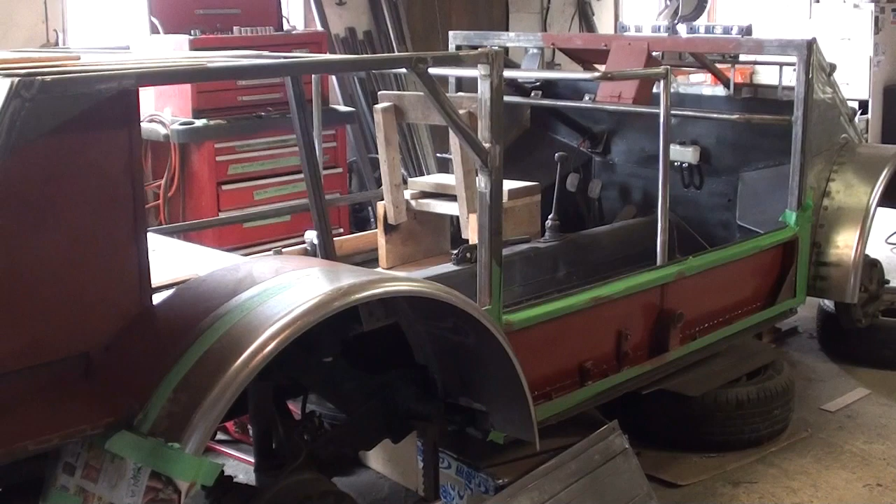Got some loose ends to tie up before I move along and start working on the body panels. So today I'm not going to get a lot of work done. Got some other projects on the go that I have to put my attention to as well.

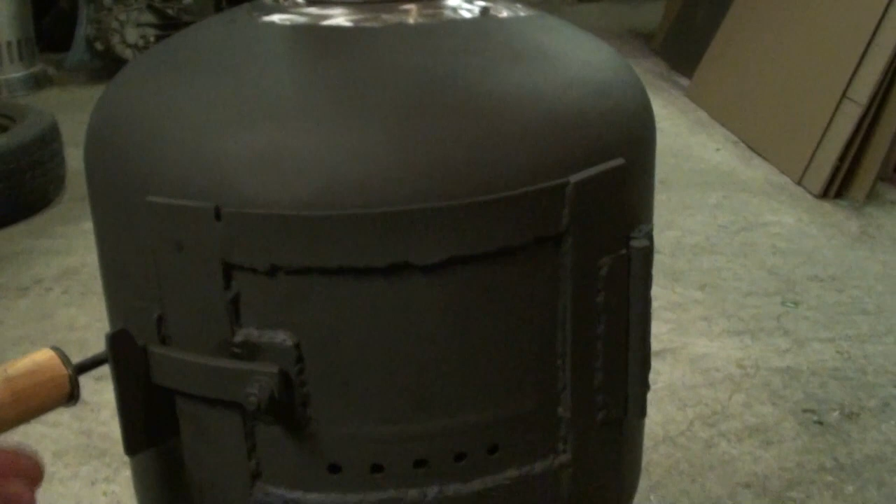I'm going to simultaneously work on the Kubel today and do some painting, and then work on making some fire pits and little mini wood stoves out of propane tanks. It's other stuff I work on from time to time. Kind of got sidetracked on this little guy, a little wood stove for my cabin. Got to finish the bead up here, and then just a little bit of paint, but it's pretty much done.

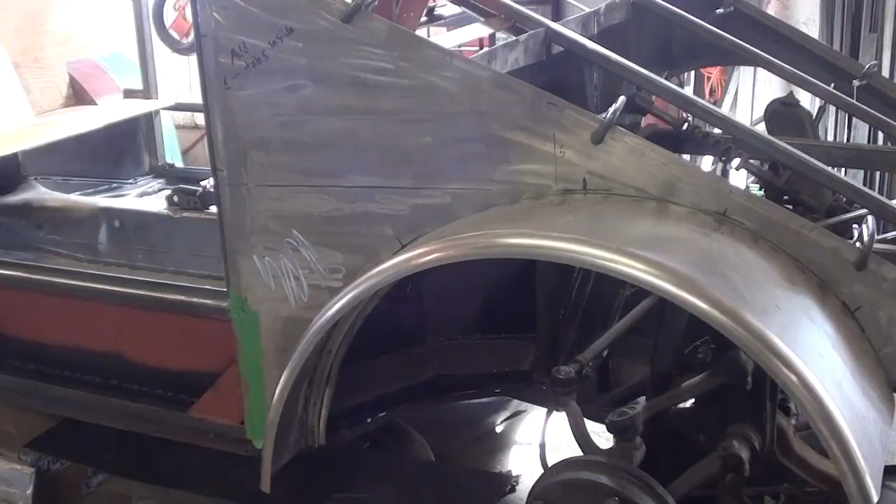Okay, so I'm going to start working on these quarter panels and getting the ribs rolled in on the bead roller. So I just have to do some layout.

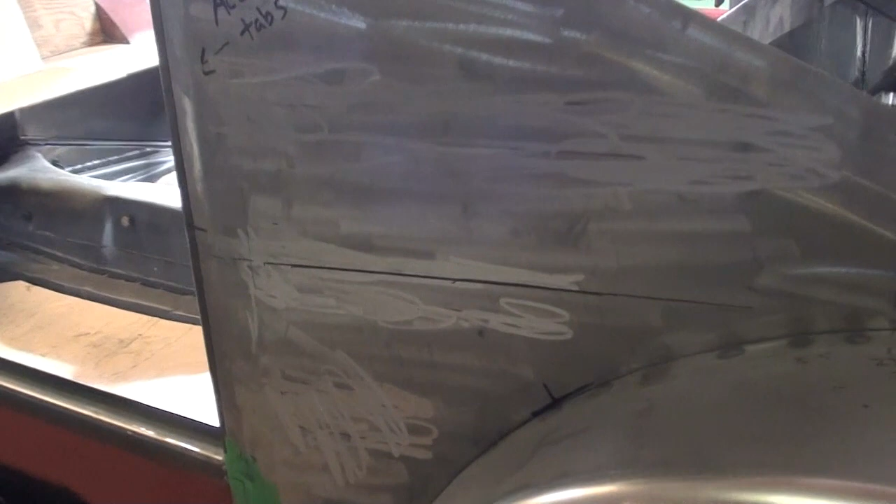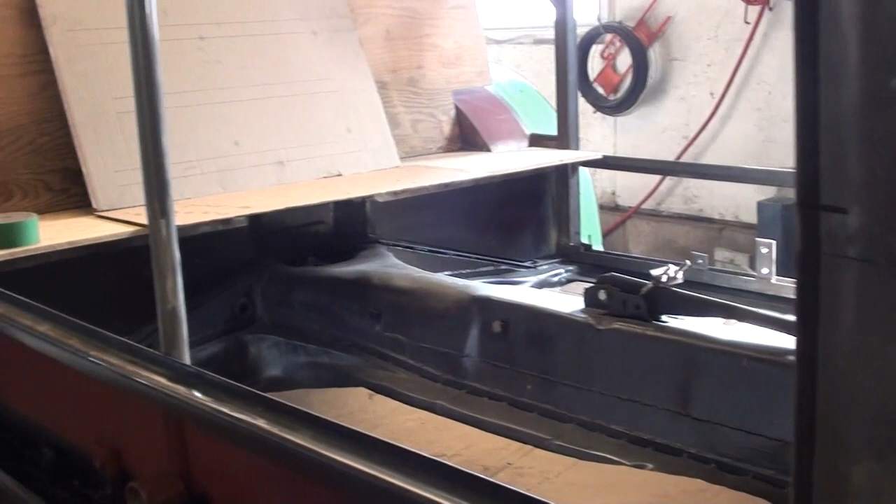I'm really precise about this line here. That's what I'm calling the master line, and I've got that going across, level, all the way, and it transfers over to the pattern on the back. Basically I just need to get the front and back quarter panel to line up to have the ribs parallel and level, and I can do the doors. I can make the doors match later - it's not going to be a problem.

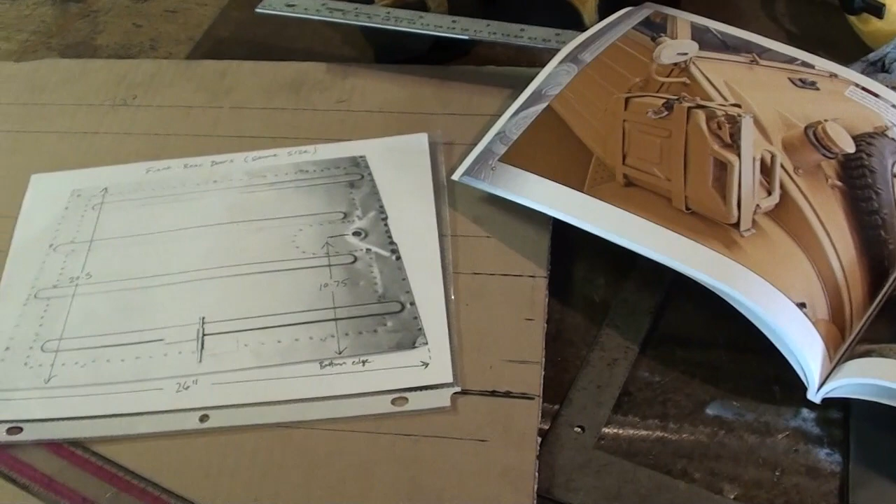So right now what I'm trying to figure out is exactly what spacing I want to use for the ribbing, and the most obvious thing you notice are the two doors and the rear quarter panel. The front quarter panel has 3 ribs on it, but they're very small and not as noticeable compared to what you see from the doors back. So my thought process is get the doors right and go from there.

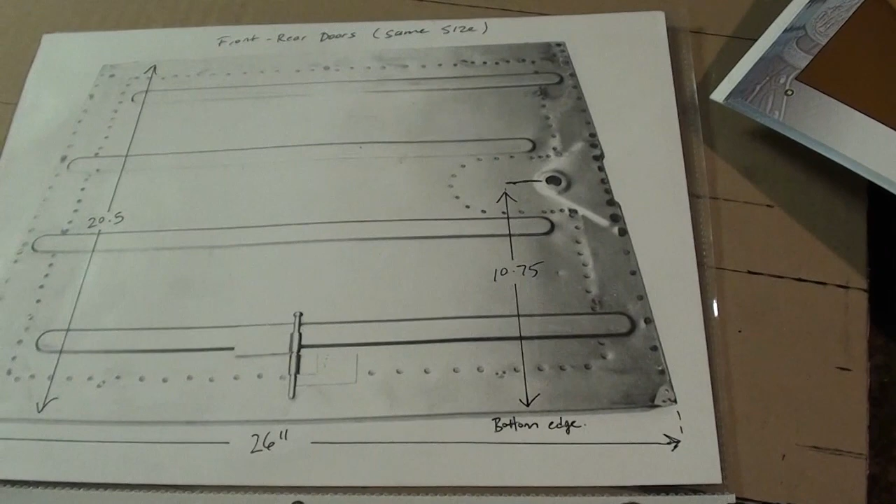Problem is I don't have doors right now. I want to make sure that rear quarter panel is right, so I'm just double checking my work. I had 3.5 inch spacing, and that's what this piece of cardboard here is - a door, 26 by 20. I centered it at 10 inches, and then came out from there evenly.

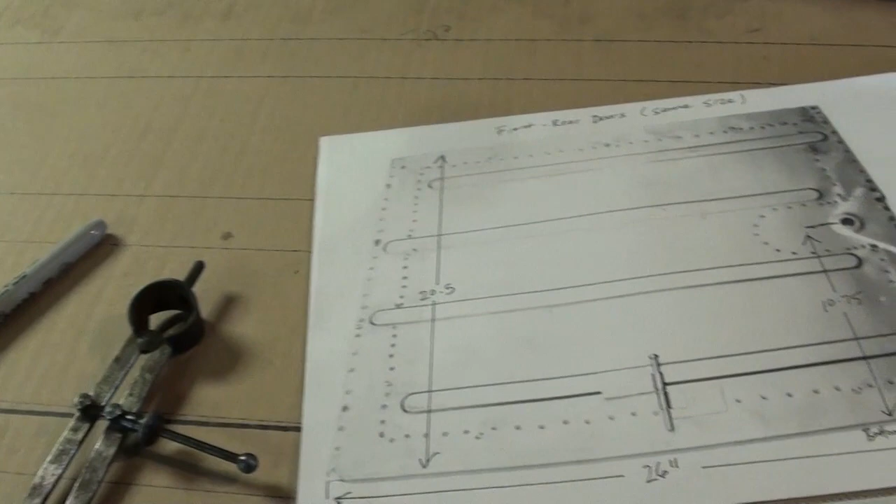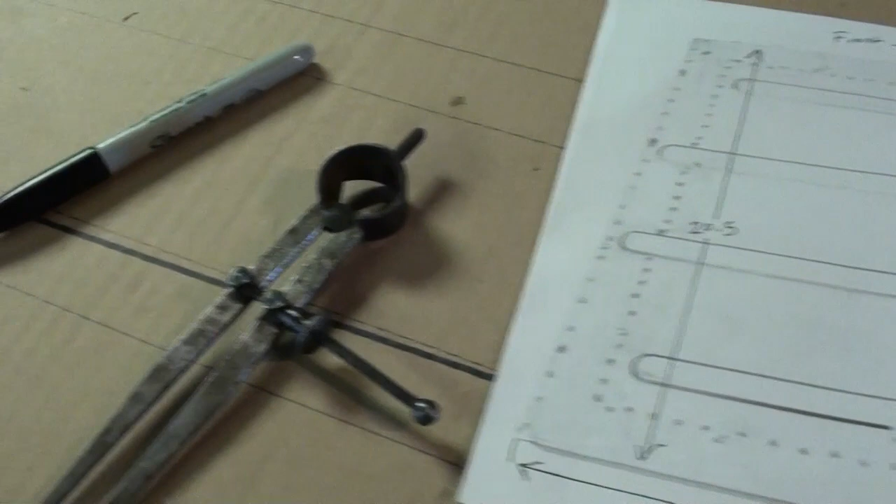This door looks pretty close to what you're getting from different sources. If you look at pictures of a Kubel, the two center ribs are pretty much centered, with an equal amount of space from the top and the bottom. So I had this cardboard mocked up at 3.5 inches, and then this morning I got it in my head that 4 inches was better. So now I'm double checking things, and I was probably correct in the first place.

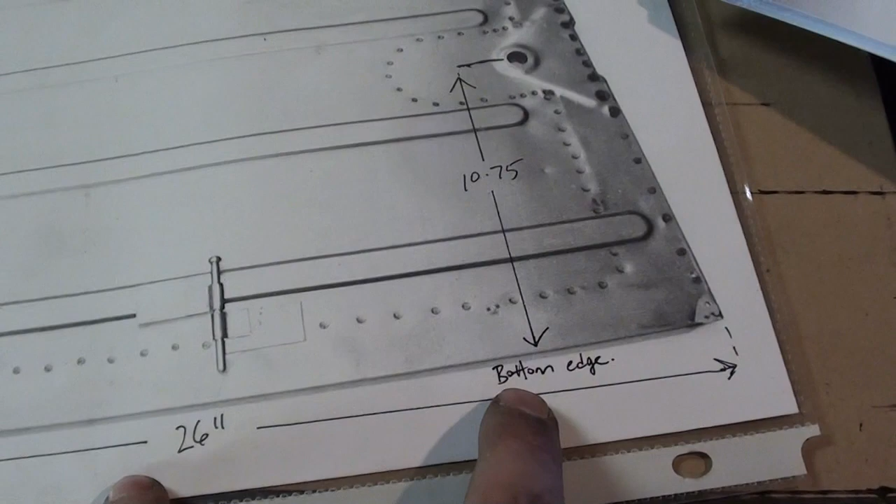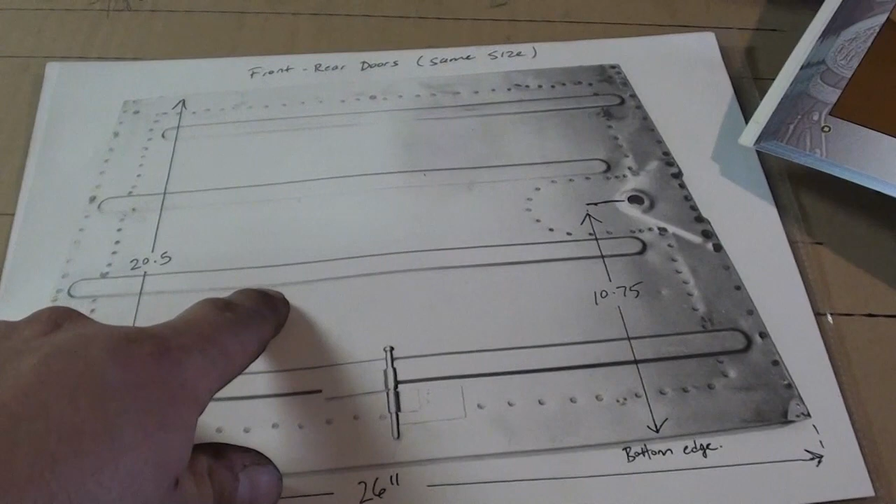The scale of this is roughly 1 centimeter equals 1 inch. Now, you can see the perspective of this photograph - they were kind of back and on an angle, so it's obviously narrower at the top. But if I look at the spacing of this rib here and the spacing from here to here, that comes into the ballpark of 3.5 inches, and it kind of successively gets smaller as you go further away because of the perspective. But I think I can trust that at 3.5.

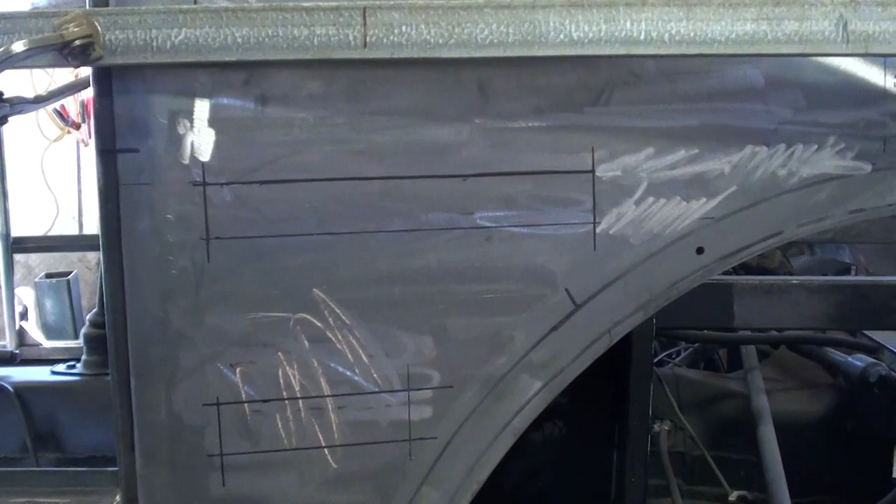So when I laid it out at 4, I thought, oh, that looks fine on the front fender, but then I started playing around with it on the back, and it just doesn't sit right. So unfortunately, I'm going to backtrack a bit here. I'm going to sand off these markings - I think what I did is I had this bar sitting on the fender, on both fenders, and that's the line I took.

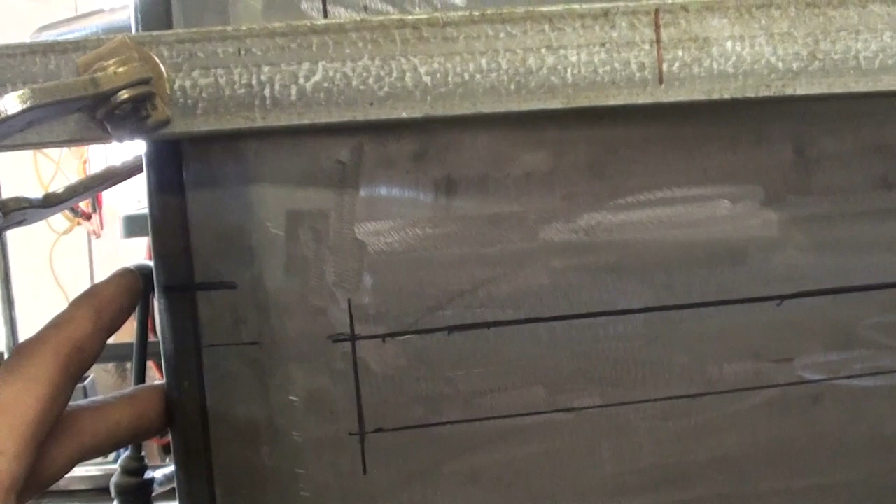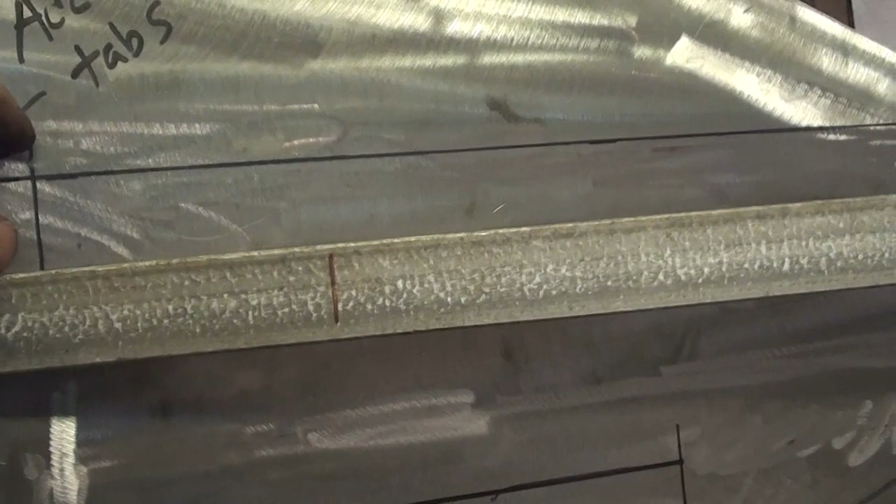I think the bar needs to be up a bit. I'm going to use the lines on the cardboard door, because that's 3.5 inches, and the perspective all looks good on the cardboard door. So I'll transfer over that line onto here, and level this bar from that line back, and that's going to be my master line. Then I'll measure the 3.5 inch spacings for the ribs. I'm using 1 inch as my gauge, because the die I'm using isn't a perfect 1 inch, but that's what I'll go with.

I'll go back, remark everything, and take some video to show you guys the end result, because I want to make sure this is bang on, the lines and everything, before I start rolling the beads in, since once that happens there's no turning back.

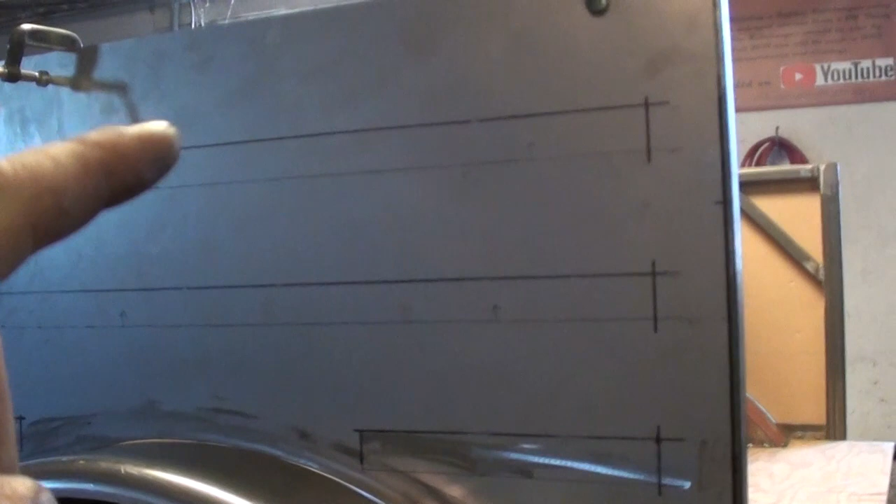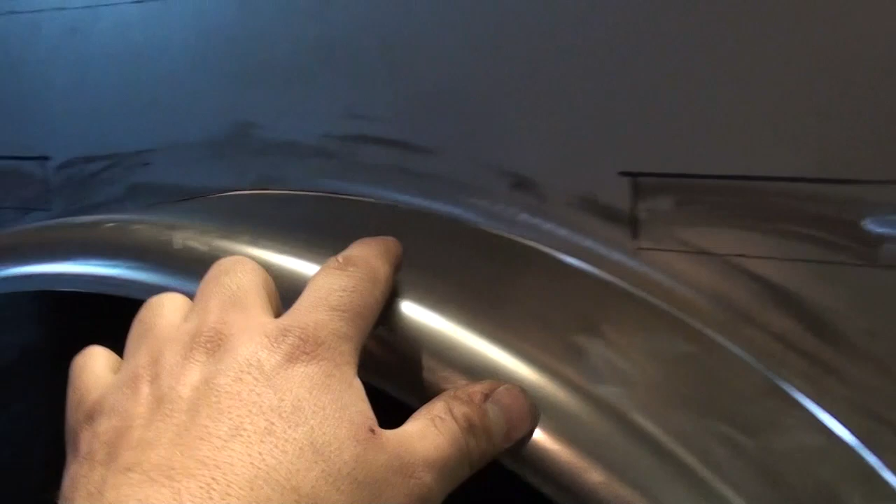So there's the layout at the 3.5 inch spacing, and there's the rear quarter panel. Not perfectly replicating a Kubelwagen. The real issue is this third rib here. It's obvious the fenders are slightly larger on an actual Kubel, they come up maybe 1 or 2 inches higher, and therefore this line is cut off more aggressively. The way I have it, the top of the line shoots almost right across. It could theoretically work, but I might cut it back, stop it a little further to give the illusion.

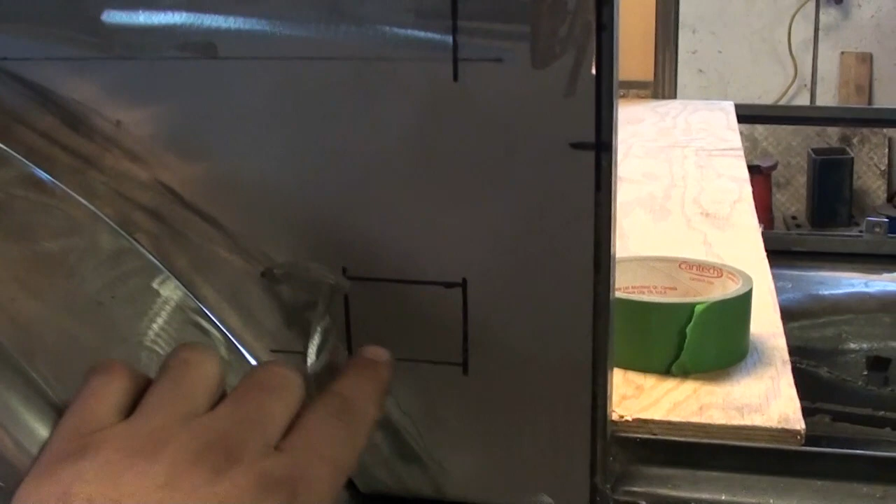And I wondered about this little guy. It's actually there, there's a little cutout, so I'm going to do that just to better replicate it.

I think I need to come over a little further. I didn't want it to come too far over, because it seems to distort the edge of the sheet metal, and I want a nice flat edge here. But I'm going to come over as far as I dare with the ribs, because on the Kubel the door and quarter panel are quite close, not much space in between, so I'm going to get that as close as I can.

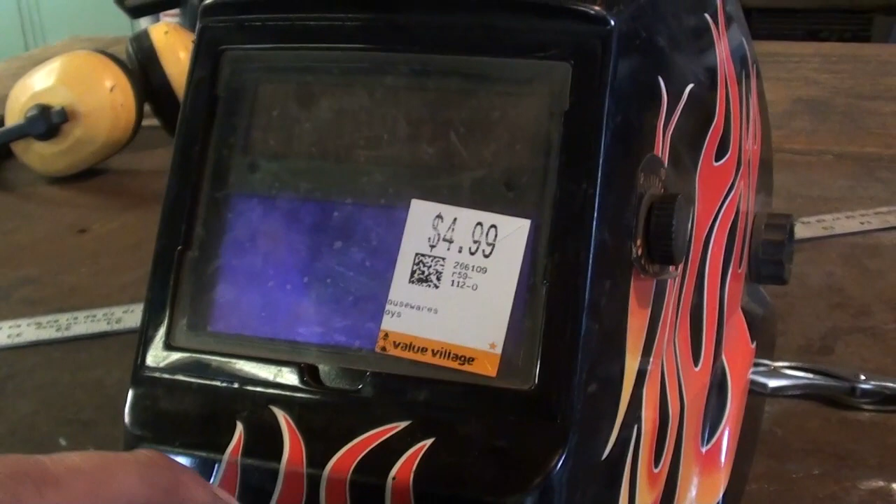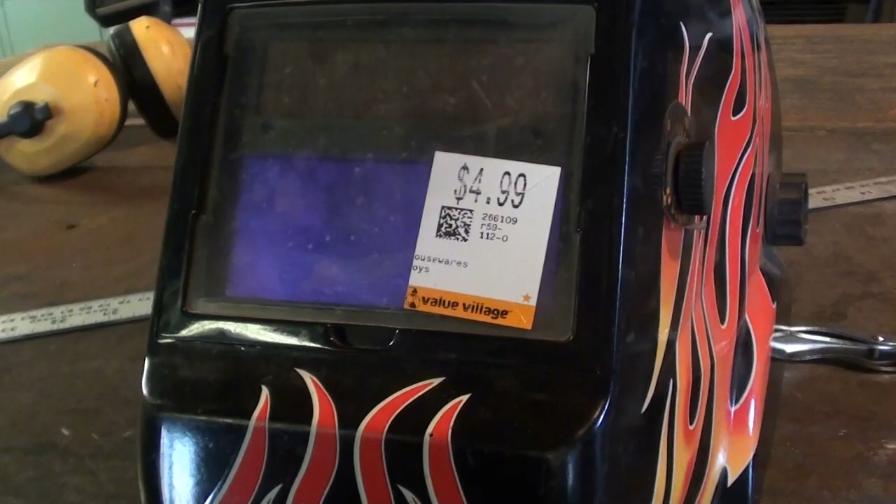Gotta save money wherever you can. Picked this up at Value Village the other day, wasn't sure if it was going to work. Didn't seem like it was working in the store. My wife thought maybe the battery was dead, so we bought it and brought it home. I let it sit outside in the sun, tested it out a minute ago, works fine. So a perfectly good welding helmet for $5.

Okay, so I got the inner rocker panel done on the driver's side now, so that's going to allow me to paint it on the inside tomorrow. It's supposed to be warm, so I'm going to put some primer and some rust paint on the inside.

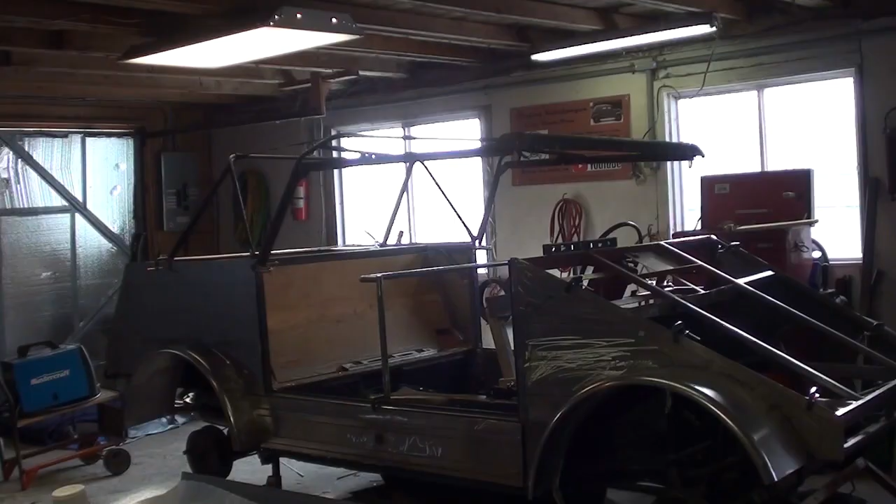So I'm just waiting for a buddy to come over and help out with some of the bead rolling on the body panels. Decided to pull this out of the barn, it's the framework for the canopy for the 181 thing, and I was hoping I'd be able to reuse it, and it's going to work.

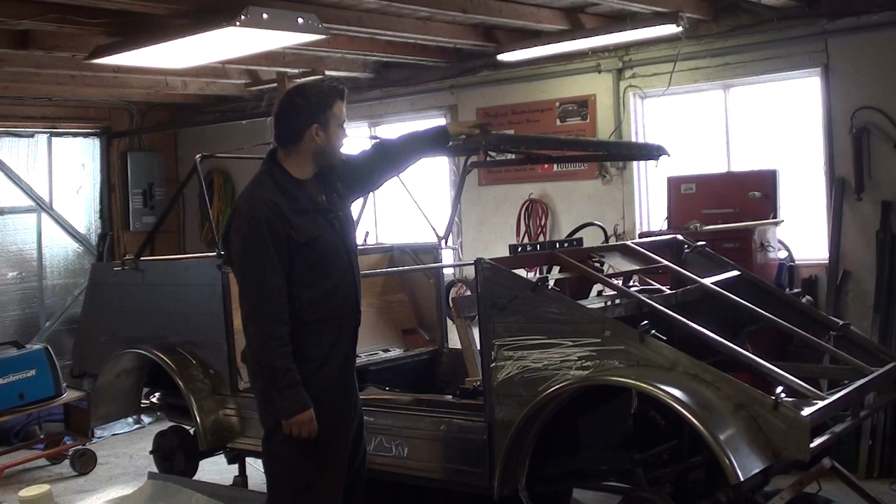Just for simplicity I kind of clamped it here. I think it needs to be mounted back a few inches for it to work right, and I might have to modify the front a bit. Obviously this piece has got to get replaced anyway because it's rusted out, but the front here is where I'll play around with the length. So I'm pretty happy that I'll be able to use this, at least temporarily.

Yeah, it's kind of backlit with those south-facing windows, so you can't really see it well, but it actually looks pretty good.

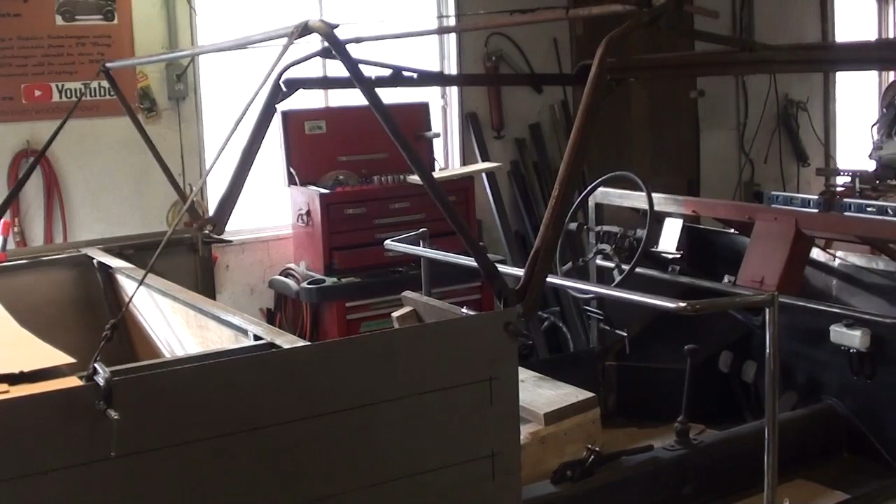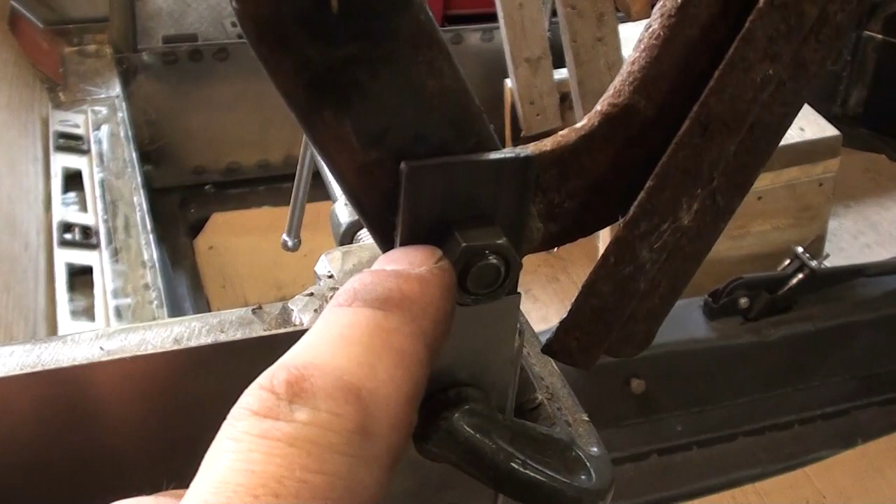It gives you a good idea what the roof line's going to look like. So yeah, there's the mounting point. Like I said, it needs to come back a few inches at least, which is easy, not a problem. It's just a piece of steel with a hole through it, and I've got it C-clamped for now.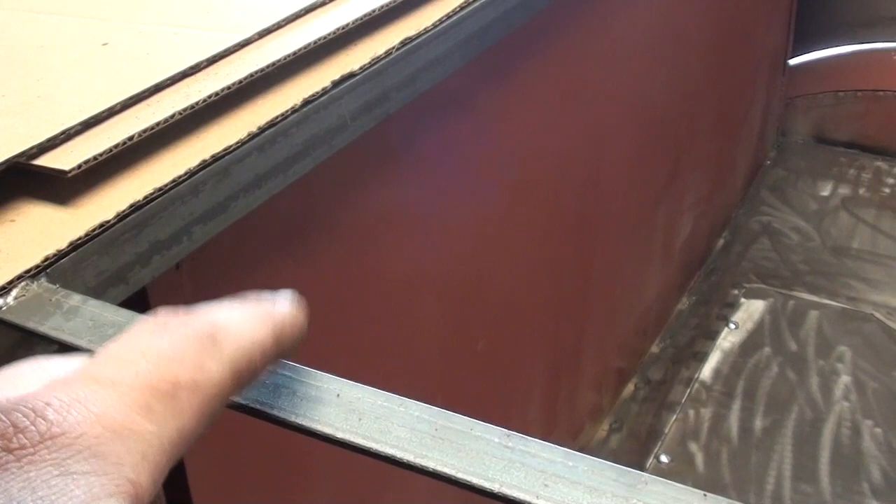It's just to get it fit and see if it's going to work. I had it folded up, and with it mounted here, when it folds up, the problem is one of the crossbars is kind of covering the trunk lid for the cargo area, which I don't like. That gets mitigated as you move it back, but I don't know if moving it back the 4 or 5 inches is actually going to change that. It's still going to be covered up just a bit, which I don't like.

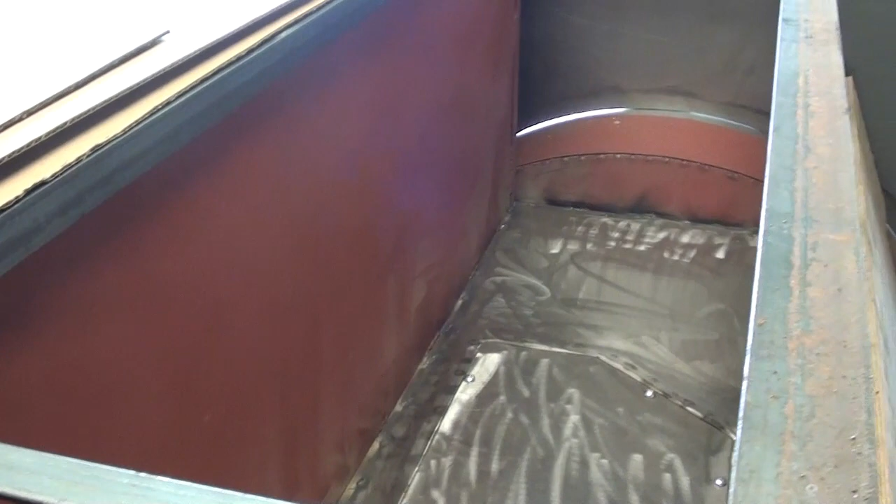One option is to make the actual lid a little smaller, maybe an inch and a half or 2 inches smaller. That way, when the canopy's folded up, you can open up the lid, right? That's how it's supposed to work. So I'll have to play around with that.

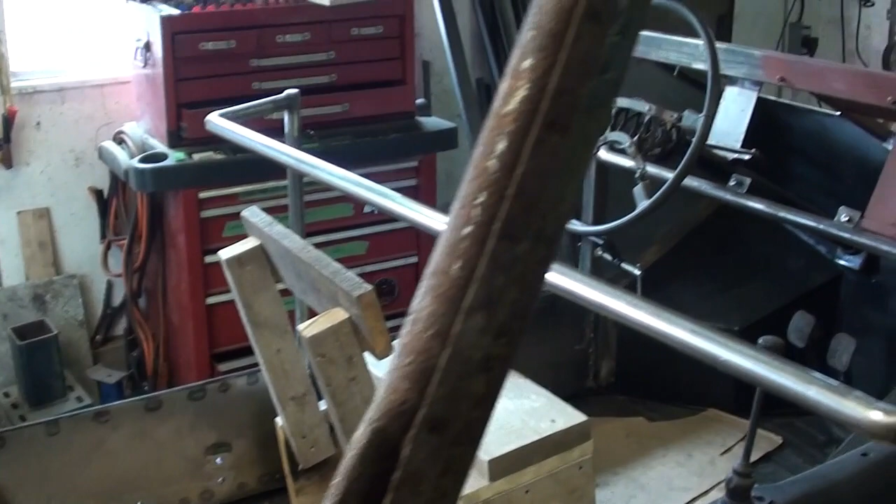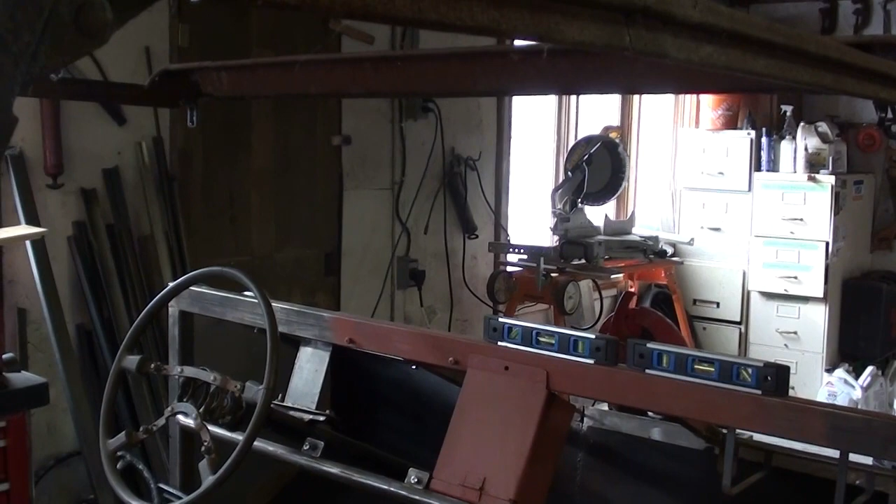It's pretty rusty, but I can just wire wheel this and give it a good coat of primer and coat of paint. For the most part, all the joints are in really good condition - it's really just surface rust. Like I said, the only piece that needs to get dealt with is that front bar, but that would have had to get replaced anyways or heavily modified to work with my new windshield frame, so not really a big deal.

One more. I think we're good there. Yeah, that feels pretty stiff.

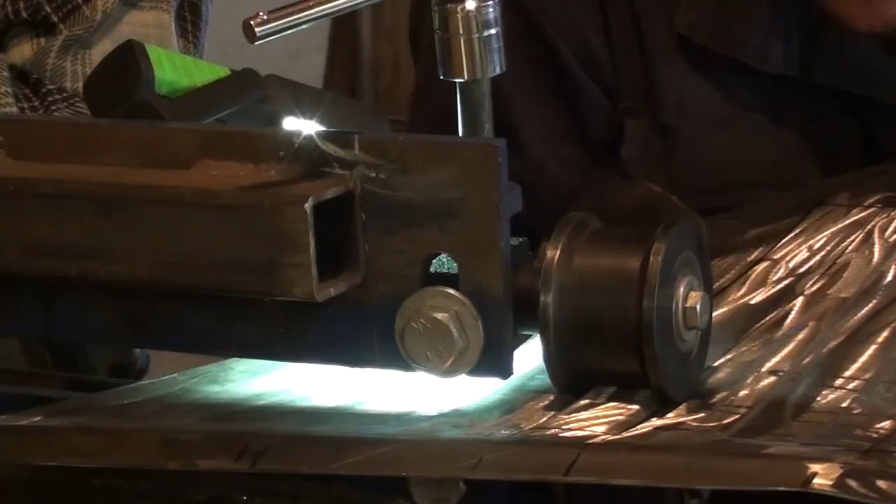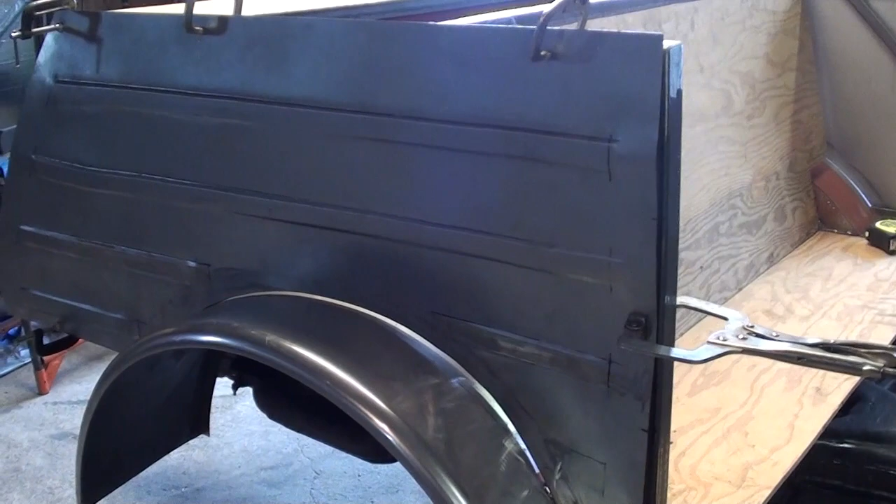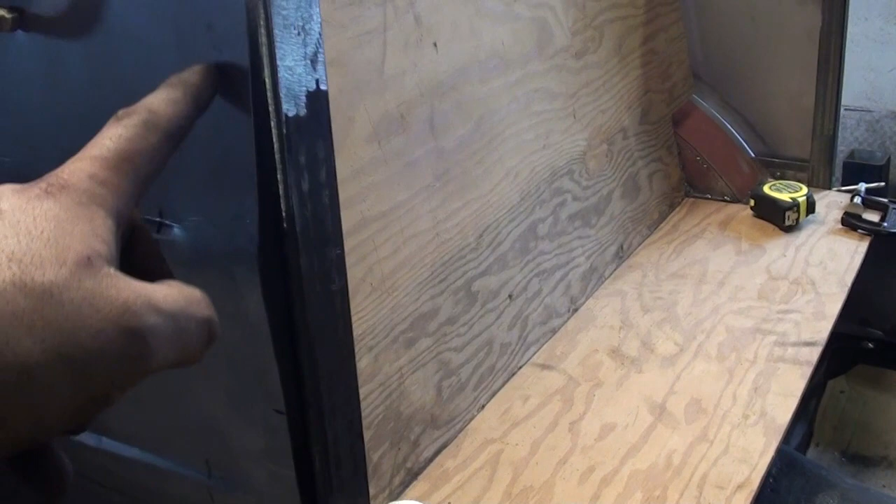Okay, so that's the rear quarter panel. As predicted, it does cause a bit of warpage, but you're able to flip over the panel and use a rubber mallet to flatten it out, and wherever there's creases, I'm pretty confident we're going to be able to clamp this down. I'm going to use plug welds along the edge, so when this all gets clamped down, it will actually weld down tight.

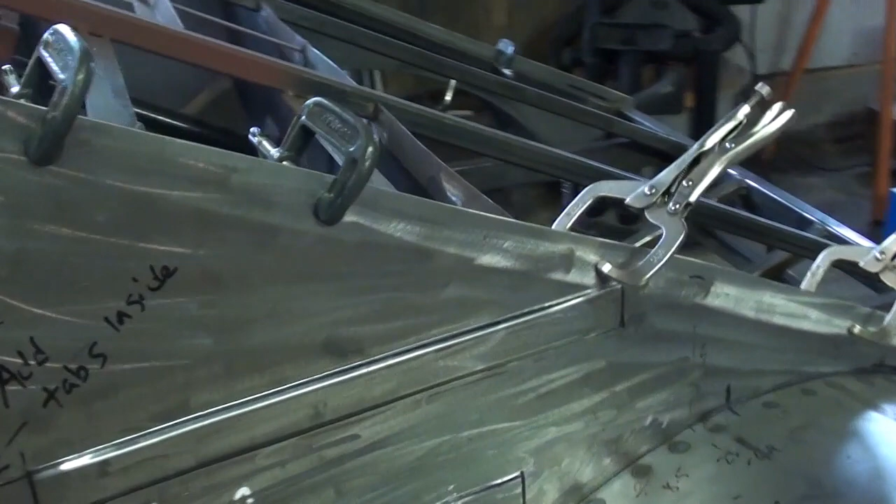If you look at the front one here, right up in this area, there was a really big warp or bow, and if you just throw the clamps on it, it flattens right out. So it might be a little bit more tedious to actually attach the panels and weld them in place, making sure everything's lined up and flat, but the main thing is the bead roller's working, and it's going to work.

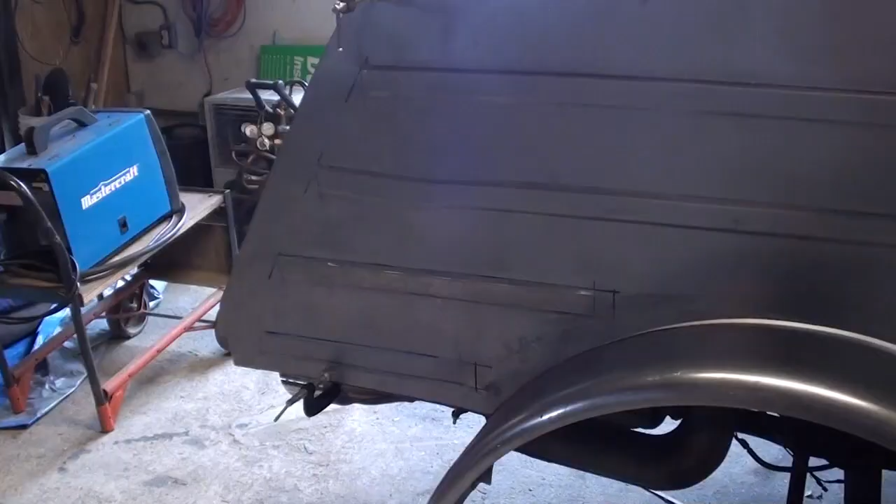Some slight inconsistencies with the line - that first center line is a little bit crooked at the back. I'm just going to have to live with it. I don't think most people are going to notice.

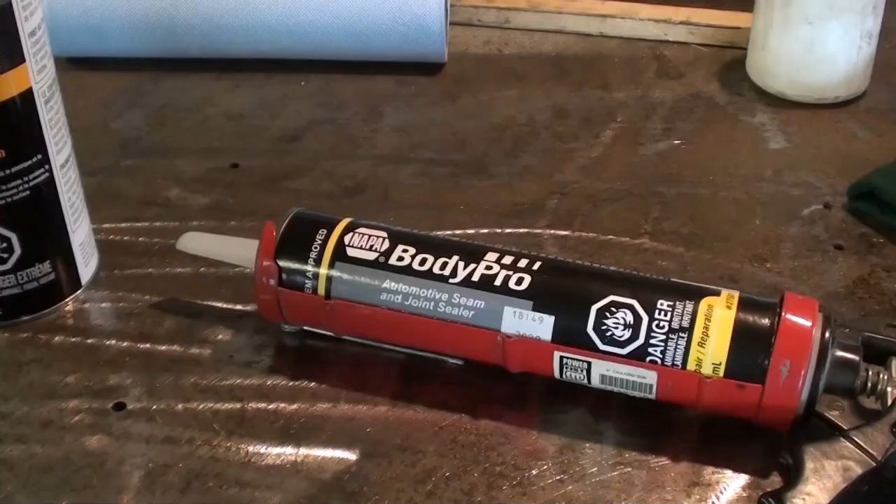So I'm just taking a little break from the body panels, and I'm going to do some painting prep. I'm going to try tomorrow to do some primer on some of the spots.

I'm cleaning with this stuff, this grease and wax remover. I think you could just use brake clean - probably do almost as good a job. Wherever there's gaps and some spots where the different panels fit together, I want to seal up, and I'm using this BodyPro that I got at NAPA.

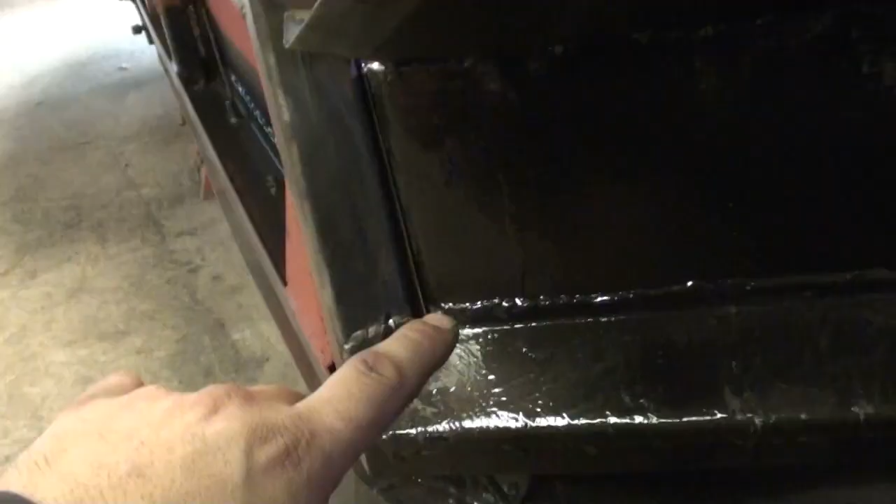It's spots like this I'm using the seam sealer on, these little gaps here. That's a place where water could get in between the two rocker panels or possibly get inside the actual vehicle. So I'm using the seam sealer on spots like that. There's some places at the back as well that I'm going to put seam sealer.

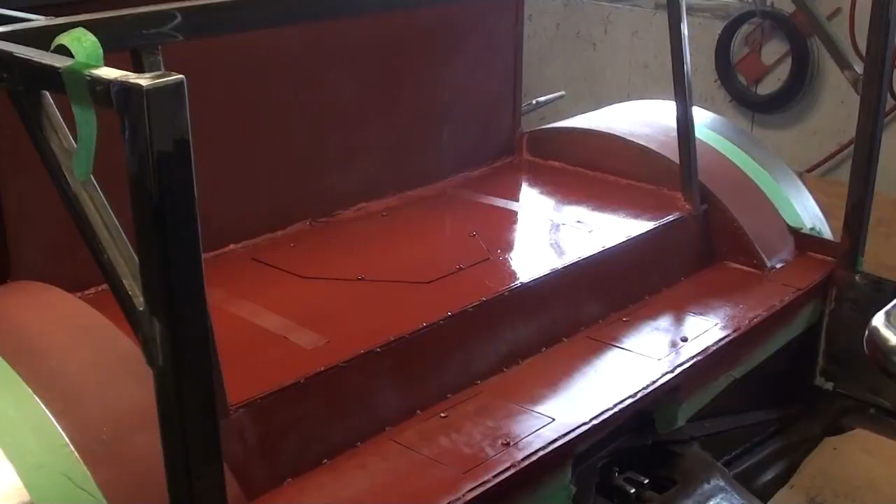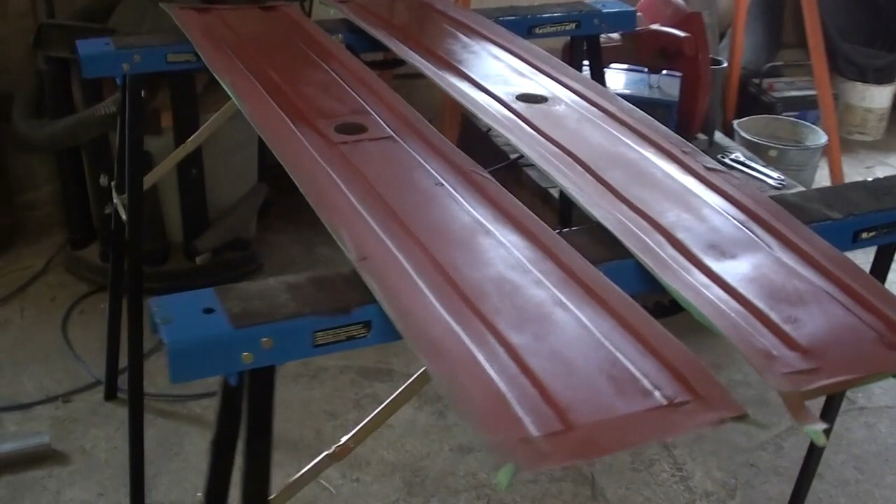Just went ahead and did a coat of primer on the back seat area. I also did the outer rocker panels on the inside. Just got some tape around the edge where I'm going to weld.